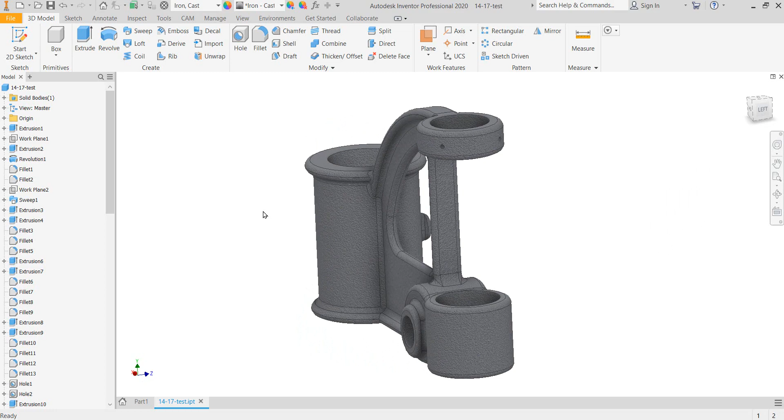All right, this week you're working on drawing 1417, which is this drill press bracket, and it's a rather complex part. There's just a lot of stuff here, but it's challenging. I think you're going to learn some new techniques in doing some of these things. Because when you get out in the real world, all the parts are not simple little blocks and cylinders. The real world is kind of complex. So this is what we're going to work on.

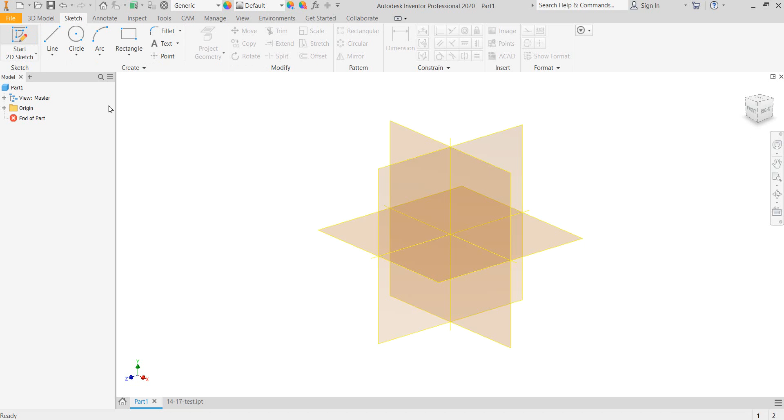So start with a new part, and I'm going to build this on the XZ plane, on my top surface plane. And we're going to build up because I want to start this thing. Remember, we use our axes to constrain our parts to. Once you start doing assemblies in another couple of weeks, you're going to see how important using the axes and the work planes are in developing your parts. So we're going to start with this one.

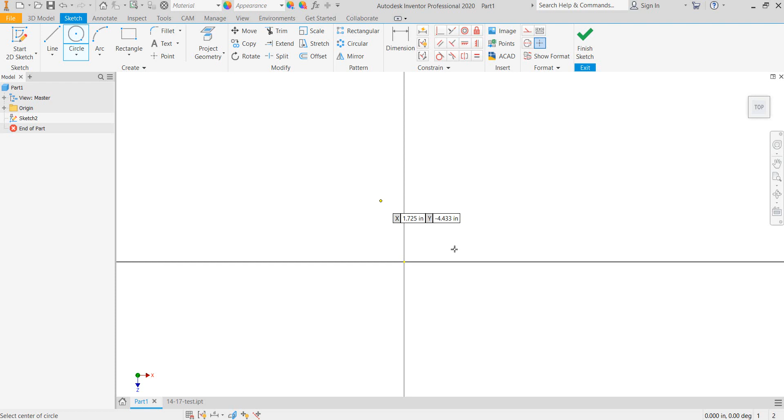Actually, let me back out of here. I really like using the primitives if I can. It just seems to save me a couple of steps. So I really like using primitives.

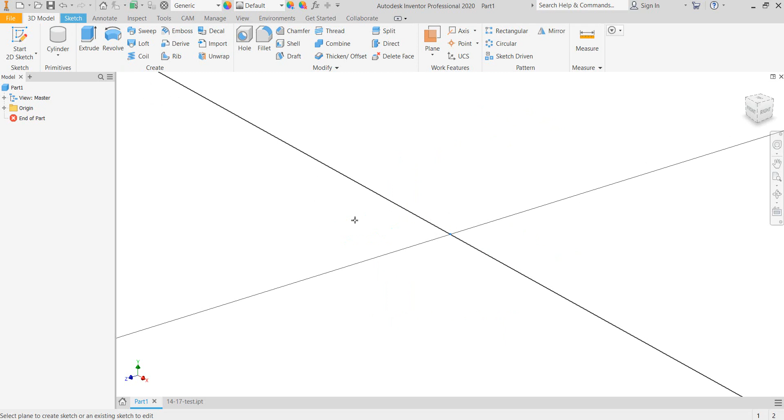So I'm going to go with a cylinder there. And I'm going to do this cylinder at the bottom, which has an outside diameter of 2, and then it has a height of 1.688. Okay, so it's got the bottom cylinder.

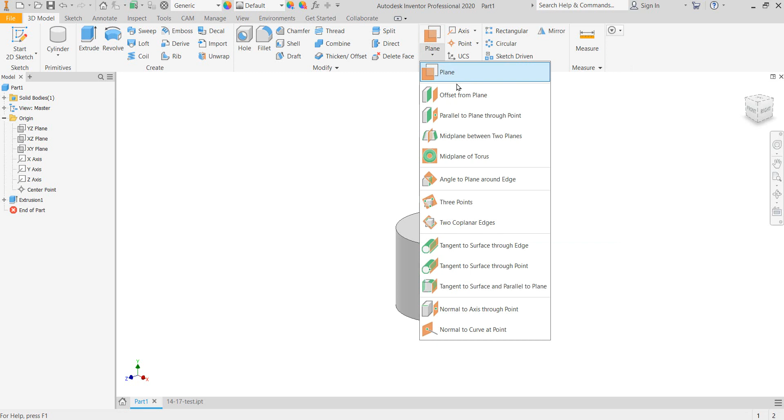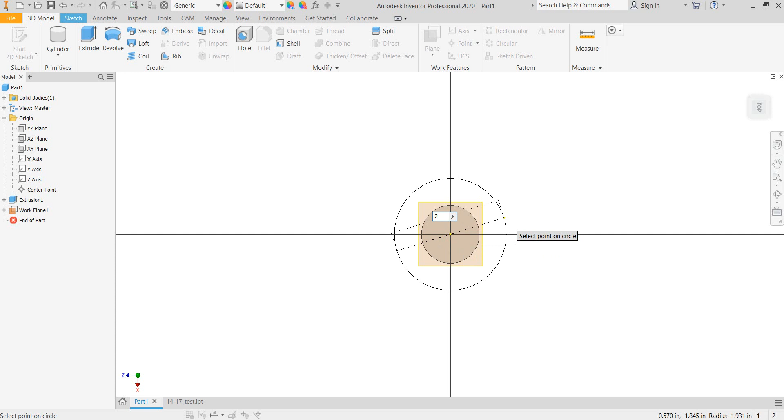And now I want to create a work plane for the top cylinder. So I'm going to go offset from plane, choose my XZ, and it is 5.88 up. And I'm going to do another cylinder on that work plane. It also has a diameter of 2, but it extrudes downward 0.688. Okay, so that's got the 2 cylinders at the front.

Now we want to do the cylinder over on the right side, and we're going to use a Revolve tool to do that. And I'm going to draw it squared off. A lot of the things in this type of project, sometimes you need the rounds and the fillets while you're modeling. Sometimes it's best to wait until the end to put those in. But this one, we're going to do it squared and then put a couple of fillets in.

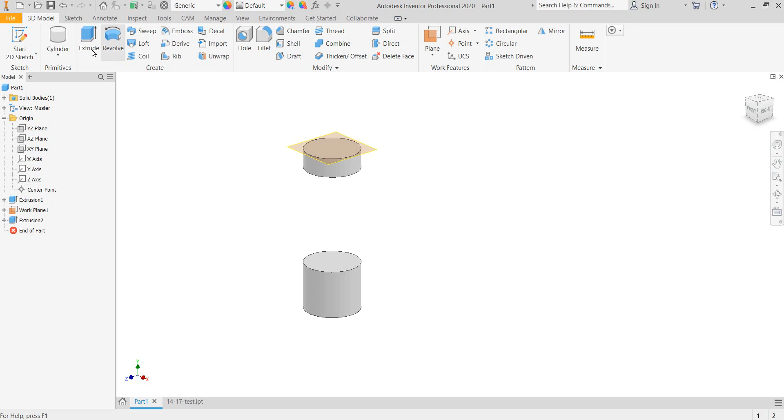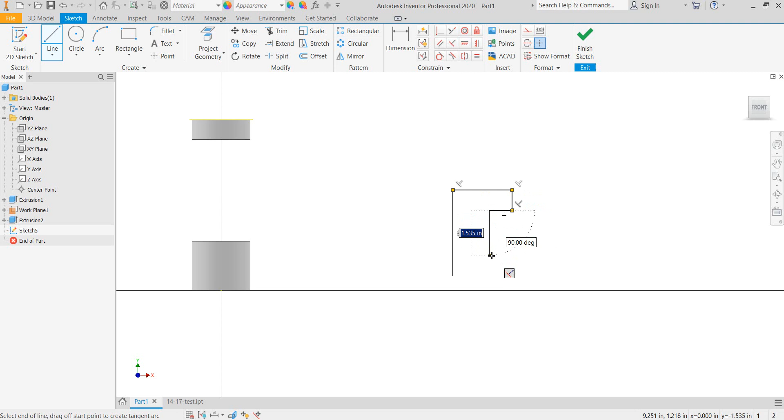So I'm going to go with a sketch on my XY plane, and I'm just going to draw the sketch out and then dimension it and constrain it. So I'm not too worried about my overall dimensions right here. I'm just getting my default snaps of perpendicular and collinear in place.

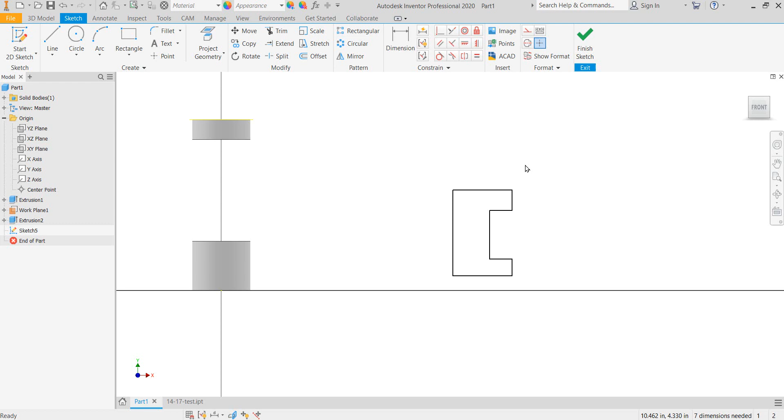And now dimensions, I'm going to dimension this, and you'll see I've turned my dimensions off so that you'll just have to read the dimensions in the textbook also. So that's why a lot of my dimensions are not going to show up right. So draw this shape - I'm going to pause my video. Draw this shape and dimension it as shown in the book, a height, things, and then we're going to constrain it and bring it back in. Okay, so let me pause just a minute.

Okay, so I got a couple of dimensions in. Then I'm going to come back. I want to show you a couple of little tricks. We're going to go with an equals constraint to make this and this equal because they are equal, okay? And I'm dimensioning the height of that side. Now I want to dimension my diameters of this cylinder.

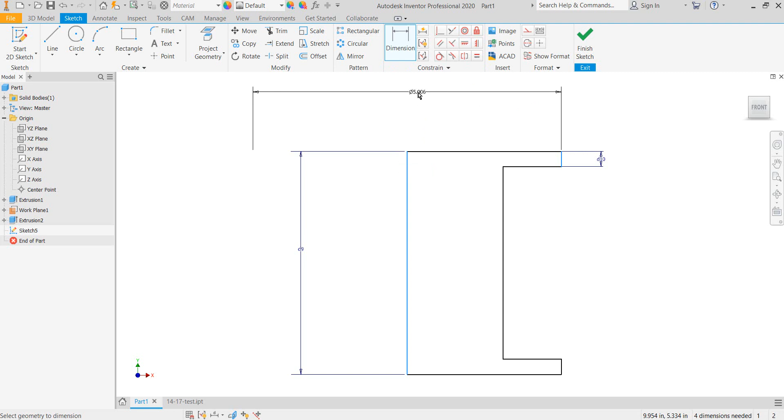So if I did it backwards - I'm going to start with my center and come out. And I'm going to right click and go linear diameter because this is a diameter, and that way I don't have to do any math. Okay, and then I'm going to do the same thing for this one.

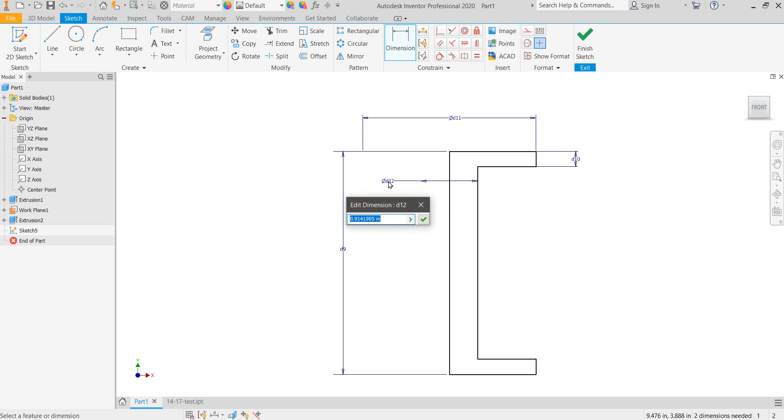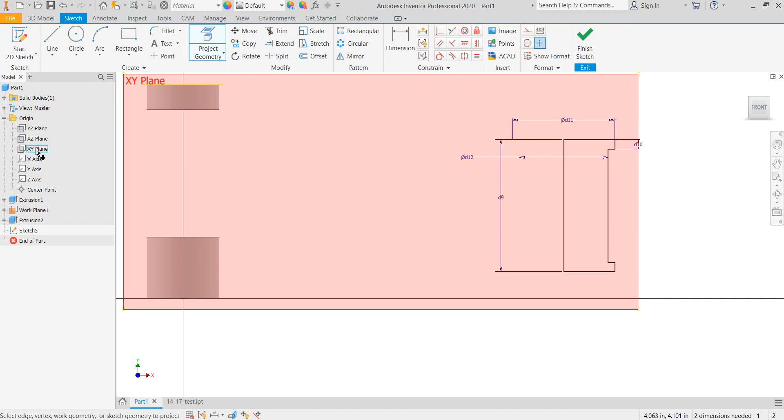All right, and then I'm going to constrain this. I can go with a horizontal constraint. I got to project geometry first. So, well, let's see, I'm going to need my y-axis and I'm going to need my x-axis. So I go with a horizontal constraint off of that axis. Okay, and then I need a distance from there to the center origin, 6.5. Okay, so now I'm fully constrained.

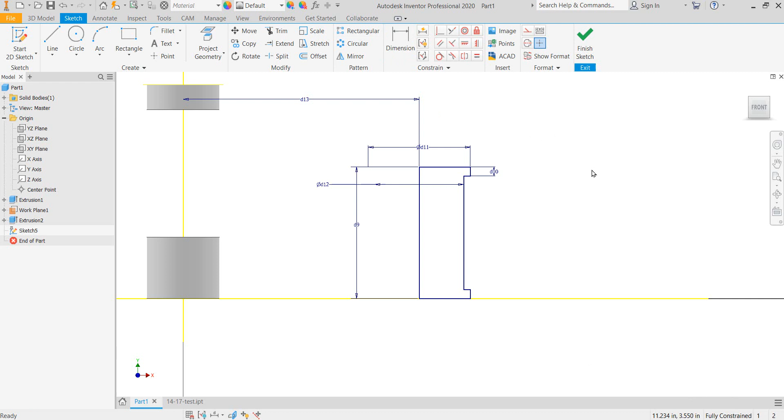And I want to really reiterate, always make sure your sketches are fully constrained. And so now we'll revolve that shape around the center of it. And that's got that. All right, I'm going to save my part file.

So I don't lose anything. All right, now having built this thing several times over the years...

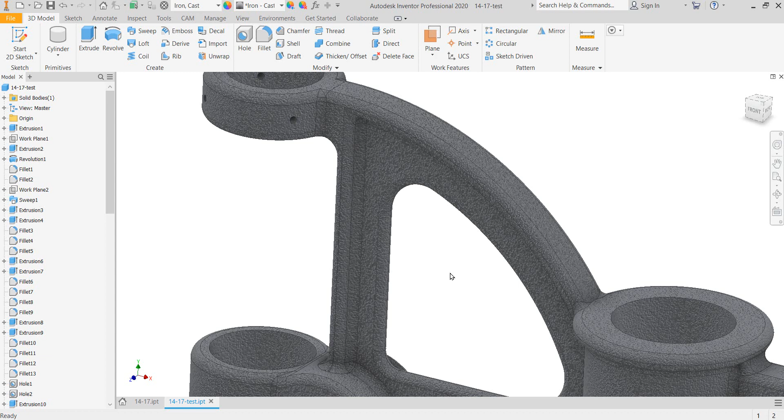The sweep of the T, this right here, has to come in based on that fillet. Now this is a cast iron part, so it's cast into a mold, and the molds are prepared either by sand casting, or it could have been a CNC'd part into the casting. So the fillets are a little creative in the way the parts are joined together. So I know that this top edge, I need a fillet for it in order to do that sweep.

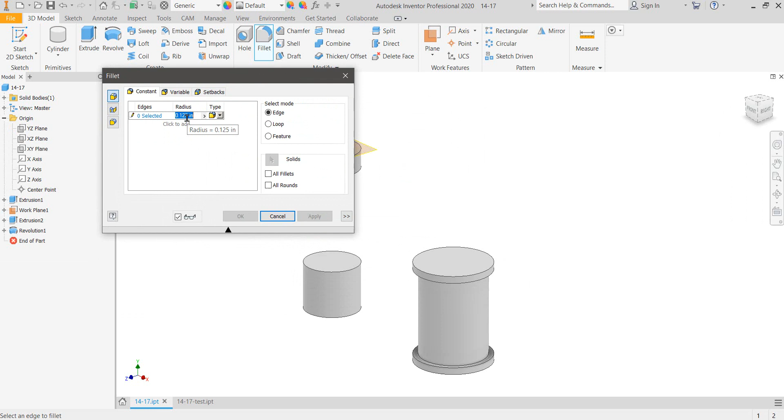So I'm going to go ahead and put a fillet in. And the default on these, it says is 0.125. And I just want to do that top edge right there. Okay, and that'll be the only one I need for right now for that.

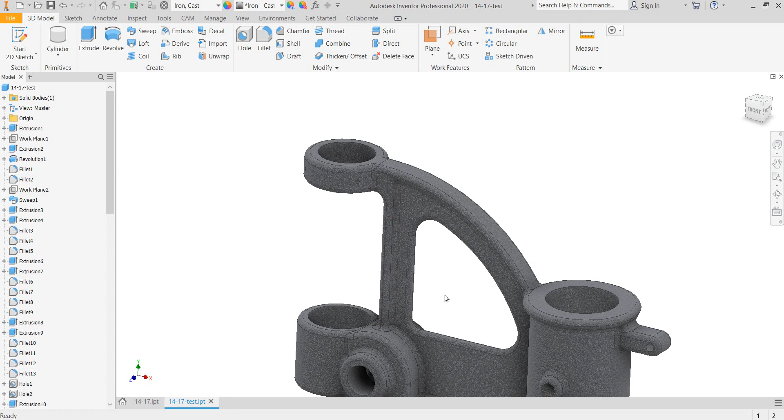Okay, now we're going to work on these T's. I've got this one I would create with a sweep. This one I'm calling the vertical T, and it's just an extrusion. And this one is my horizontal T, which is just an extrusion also. So I'm going to work on this, the sweep T.

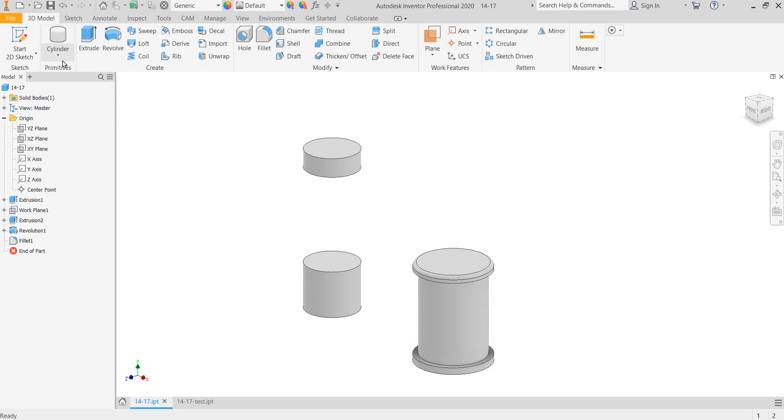So I need two sketches, one I will put on a regular plane, and the other I need to create a work plane. So I'm going to hide that work plane. And let's see, let's go ahead with the sweep path. So let's do a sketch on my XY. And to make it easier, I'm going to slice my graphics.

Okay, the sketch for the path of this profile for the sweep, it's been a little frustrating to me. I worked through it previously, and then when I come back and try to do it again today, it's not cooperating. What's going on? So I had to go back and play with it again. So anyway, I got my sketch.

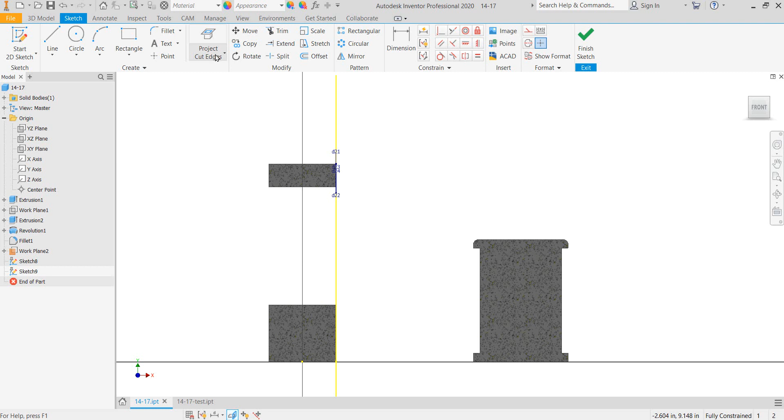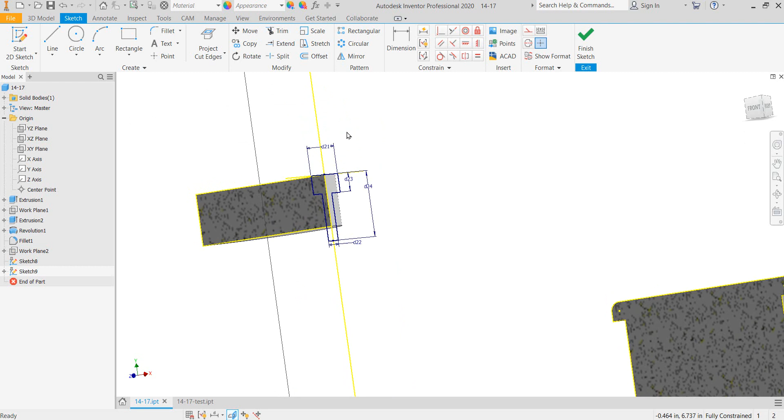And I'm going to go project cut edges. Now that's kind of an overkill in this case, but it's what I need because I just need so many different little things up here. Why are those dimensions showing up? Oh, because I've already got the sketch. Those dimensions are showing because I've got this sketch showing. So let me hide that sketch just a little bit.

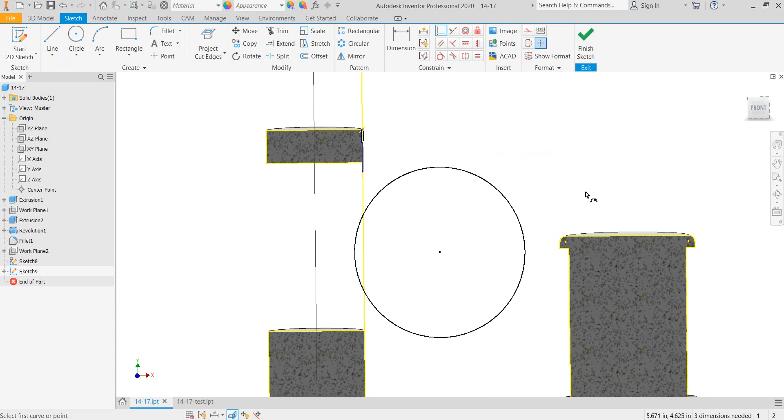Okay, so now we want to sketch a circle. And I'm going to pop it in here. And I'm going to do a coincident constraint from the circle to that point of tangency between the top and the fillet. And then I'm going to do a tangent between that surface and the circle.

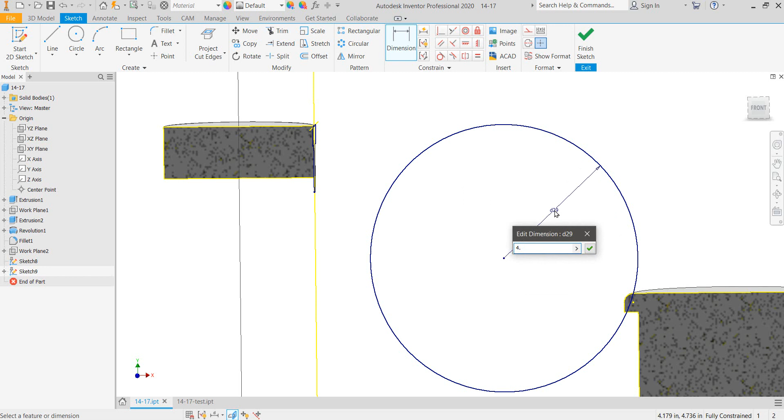And then I'm going to dimension the circle with a radius. Okay, and that's what I want. I've got it dimensioned. It's tangent at the top, passes through that corner, passes through that corner. Well, it almost passes through that corner. Okay, so it's like super, super close.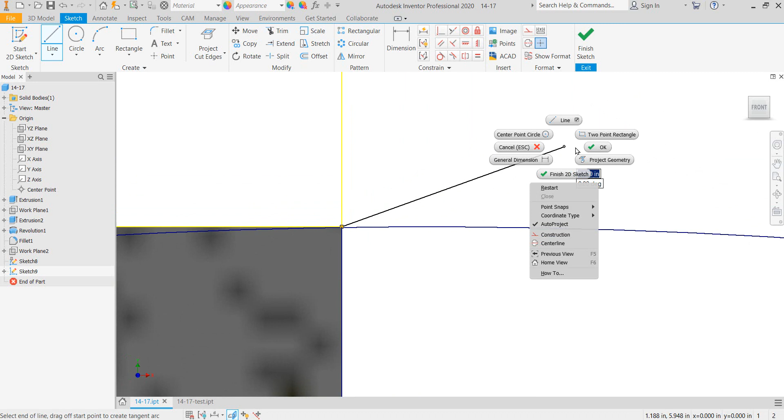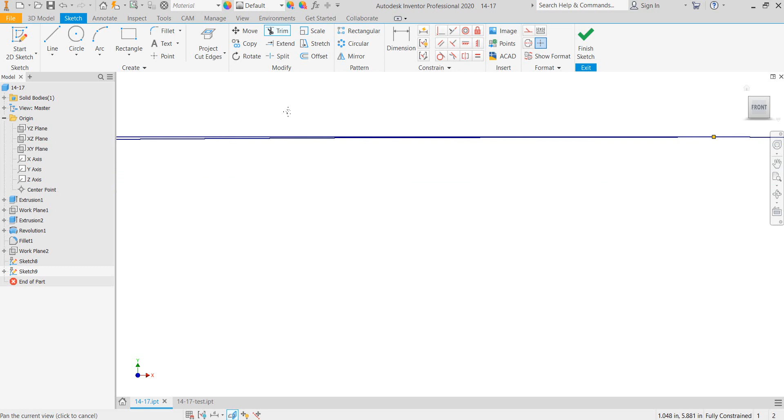I'm going to draw me a weird angle line out here. And then I'm going to make it collinear with the top. And then I'm going to do some trimming. The top edge of the line. Whoa. I would have thought, yeah. There we go. Okay.

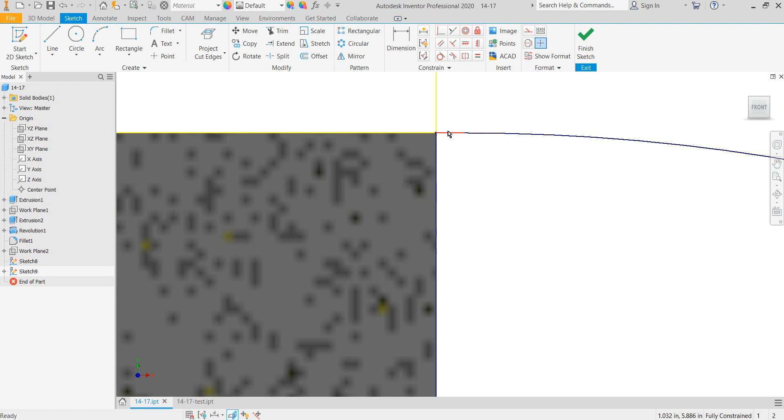And so I've got this arc that is coincident here, tangent, it's got a little straight line there. It's tangent coming down, passes through the fillet at that point, and comes all the way to the bottom. That's the sketch that I want for my path.

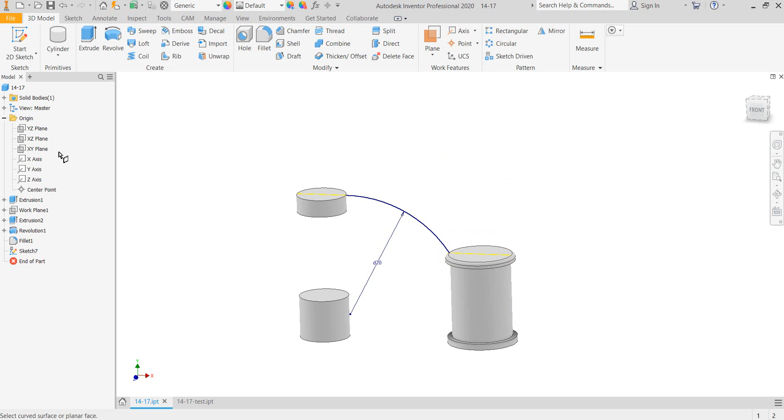Now I need a work plane tangent to the edge of these cylinders here to put my sketch on. So I'm going to go work plane, tangent to surface, parallel to plane. And it's going to be parallel to this plane on that edge of the surface. And we're going to do a 2D sketch on that.

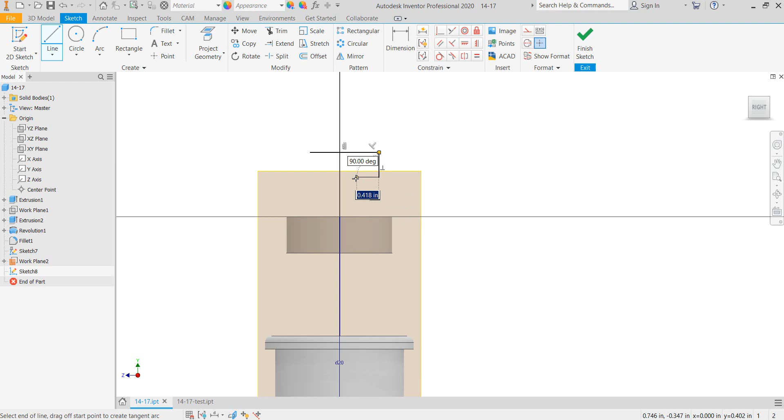And this is going to be for the T that's coming down. So I will just come up here and I'm going to sketch out a rough shape of the T and then come back in and dimension and constrain it.

Okay, let's project some geometry. I need that surface. And let's see which one. I need the y-axis. And I'll do a coincident constraint of the midpoint of these two lines onto that axis. And then I'll apply the dimensions. And I'll do a collinear constraint.

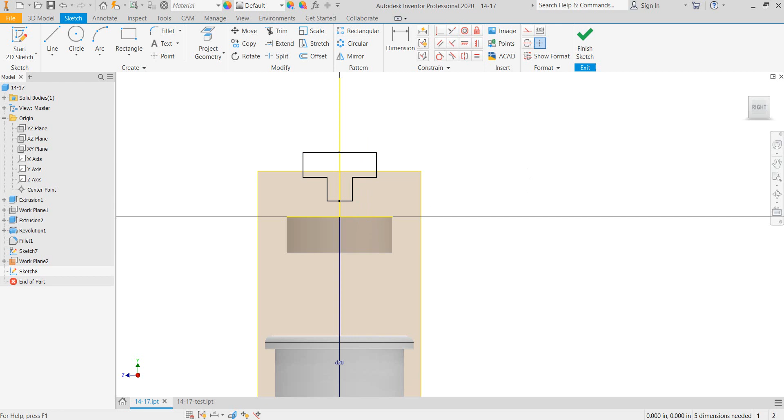I'm going to dimension it first, but collinear constraint from there to there. If I do it now, it'll invert the thing. Okay, so I got dimensions applied and that collinear constraint across the top. It tells me I'm fully dimensioned. So I'll finish this sketch.

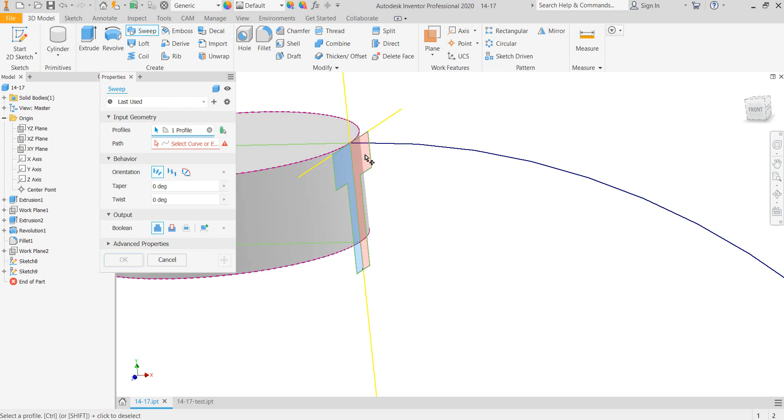And so now I'll do my sweep. For the profile, I choose this T shape. For my path, I'll choose that arc. There. That's what I want, right there.